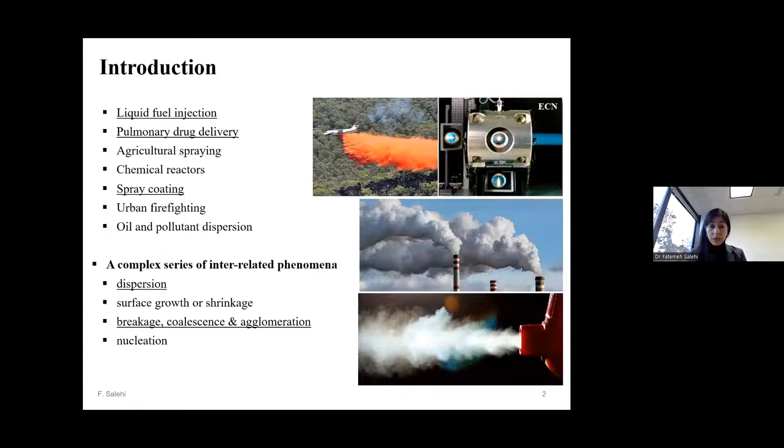As you're all aware, the majority of these applications are turbulent flows. So we can use direct numerical simulation, large eddy simulation, or RANS. In DNS, just a quick note, we resolve all the scales. In LES, we only resolve larger scales and model the smaller scales. In RANS, we basically model the average, and we're not resolving any scales.

Since we're dealing with two-phase flow, there are two broad categories we can classify simulations or modeling approaches into. The first is the Eulerian approach, where these methods define the cloud of droplets or particles by their velocity and concentration. These approaches are mainly suitable for primary atomization, for dense particle scenarios, for example in a biomass process.

We have another category called Eulerian-Lagrangian. What we basically do in this approach is use the Lagrangian method for the liquid or solid phase, assuming they are dispersed, and then track their dynamics, approximated as evolving points in space. This approach is more suitable for dilute spray regimes, secondary breakup, and low load particle flows.

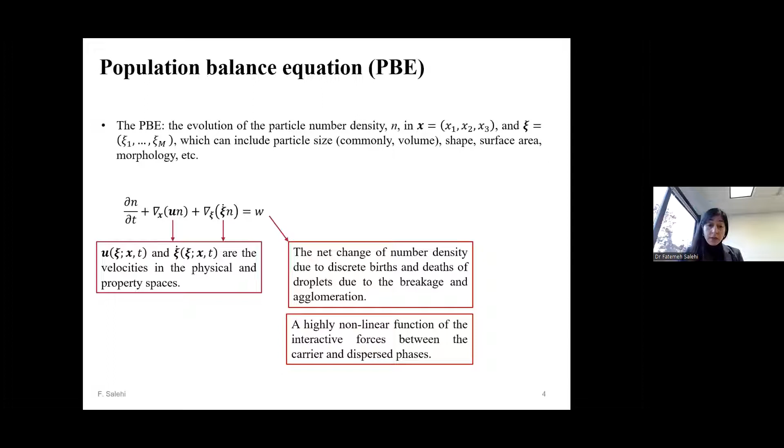So the projects that we actually work on were motivated by secondary breakup in combustion devices, but secondary breakup is relevant to other spray applications as well. The experimental study by Kourmatzis and Masri shows that the shapes of the droplets are quite important.

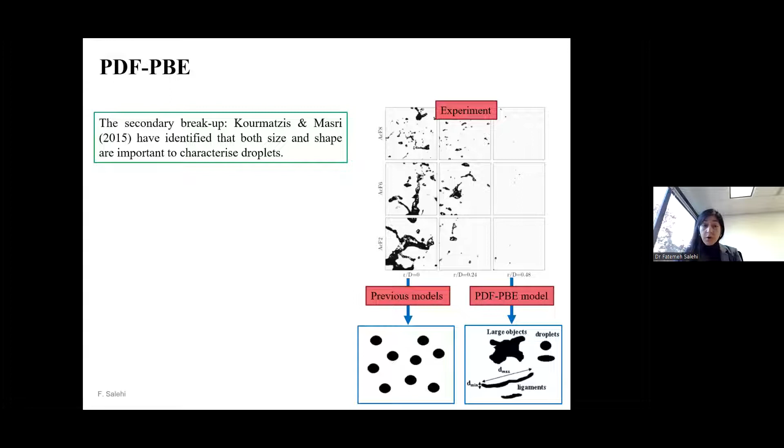It's not only their size, shapes are important to characterize droplets further downstream. What usual models do in secondary breakup, they assume they're all spherical. What we try to do with the PDF population balance equation model is to account somehow for the effect of the shape of droplets.

Since it's motivated by secondary droplet breakup, we consider our property space to include two parameters, or two properties. The first one is the size, and the second one is the shape. And we're focusing on non-evaporating spray, so basically the third term becomes zero or not important, and we end up solving a more simplified transport equation.

So this is the continuous equation. And when it comes to LES, particularly turbulent flow, the source term becomes highly nonlinear and challenging to model. PDF, or probability density function, is the approach that we can take to address this problem.

So we're using large eddy simulation for the carrier phase, which here is the gas phase, and we're using a PDF version of the population balance equation for the dispersed phase. The PDF version of the population balance is a continuous function, but its turbulent distribution is represented stochastically by an ensemble of Lagrangian notional particles in the Monte Carlo simulation.

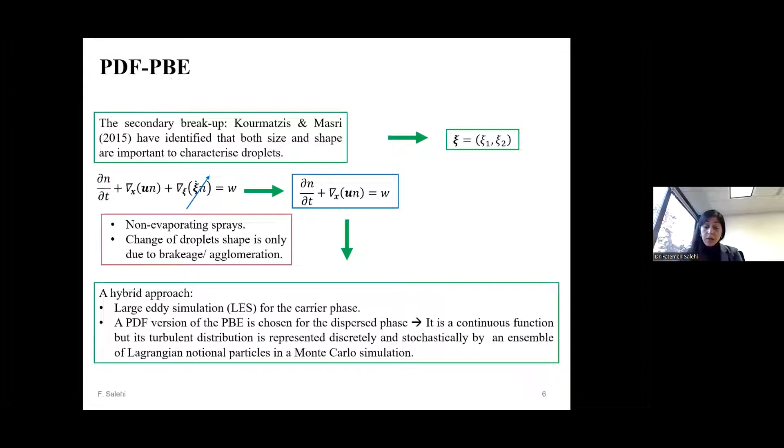Again, it's the standard basic concept of the PDF. The challenge is that if you're looking at this problem, in general the number density represents a range of droplet size and shape with very different slip velocities.

We cannot represent all droplet sizes and shapes with a single PDF. This is because of the different trajectory that the droplet will take due to inertia effects.

So to overcome this challenge, we came up with an approach. We're going to divide the PDF population balance into classes, and assume these classes represent the turbulent distribution of the number density of droplets that have similar inertial interaction with the carrier phase. I'm going to talk about how we come up with these classes later.

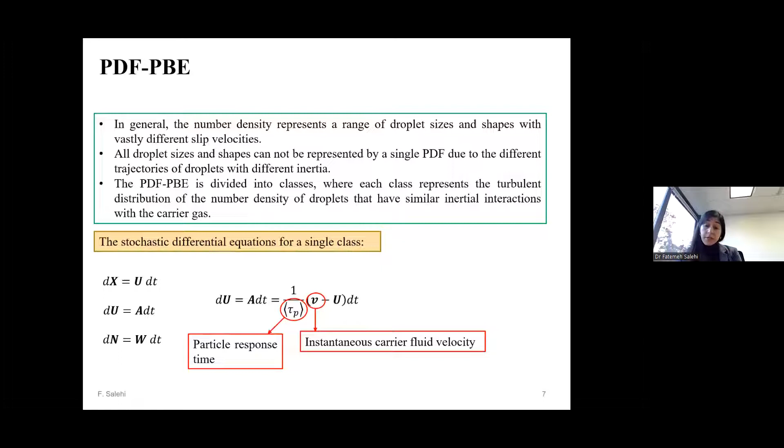But assume we have these classes, and then we can write down the stochastic differential equation for each class, which is similar to the standard stochastic equation for droplets. In this formulation, we have two parameters that we require to calculate or somehow address. The first one is the particle response time, and the second one is the instantaneous carrier fluid velocity, or the carrier velocity seen by the particle.

So this is because we're using the stochastic approach here. Tau p represents the mean across the class of droplet response time. This is due to the fluid-droplet interaction, and it's actually a function of the drag force. So if we assume each class is limited to droplets of only one size and one shape, basically this mean value or response time becomes equal to the response time of that particle size and shape.

The equation that we can write uses the function, the relation between tau p and drag force and slip velocity. The drag force is a function of the droplet size and shape.

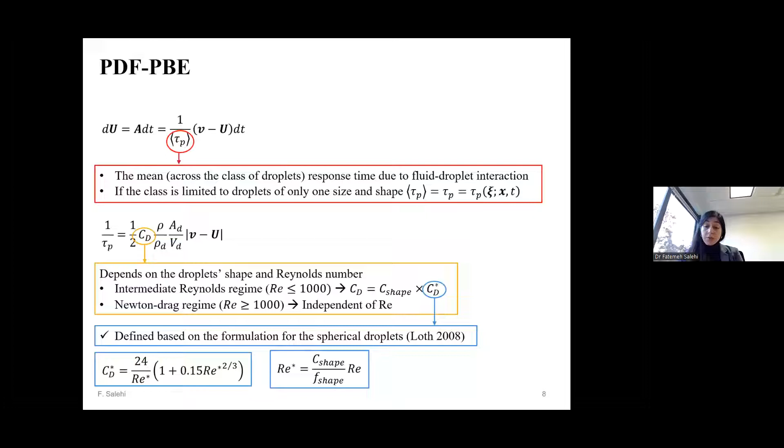Again, since we want to somehow account for the droplet shapes, we're using a modified drag coefficient, which is defined based on a Reynolds star that considers the shape factor. These shape factors come from the experimental study done previously by Loth and are available for different shapes.

The second one, as I mentioned, is how we're going to estimate the carrier fluid velocity. So this is the instantaneous velocity, or the velocity seen by the particle droplets. What we have from the LES is the filtered velocity, so somehow we need to approximate the fluctuating component.

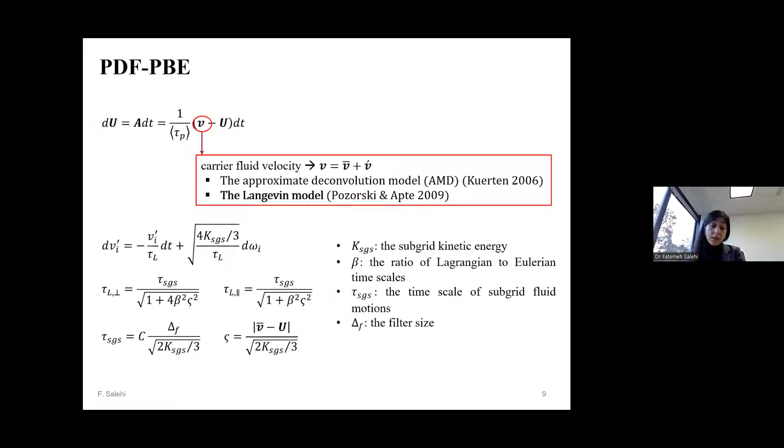So there are two broad categories. The first one is the approximate deconvolution model, AMD. And the second group is the Langevin model. There are different versions, so it could be very simple or very complex. Here we adopted a Pozorski version that assumes a stochastic equation to compute the fluctuating component.

So now it's about how we're going to identify the classes. We have an equation for each class, but the key is how we're going to identify these classes to ensure we're addressing the effect of the inertia.

We adopted a numerical method based on the Stokes concept. Stokes is a non-dimensional number that somehow represents the effect of inertia. It's the ratio between the particle response time and flow response time.

So a single notional particle represents a class of the number density function without significantly compromising the accuracy of the droplet inertia trajectories. We want to ensure we are not compromising the accuracy, that we're somehow addressing the effect of inertia. We can consider two extreme cases.

The first one is when there is no inertia forces. For example, droplet sizes are very small and they basically evolve with the carrier phase velocity. In that scenario, solving the PDF-PBE on an ensemble of notional particles means each particle in turbulence will represent a single realization of the entire number density function.

And we have a brute force option where we have a notional particle that represents only one size and one shape. Basically, our method becomes essentially a point model for a droplet.

We want to come up with something in between, and for this purpose we're using the concept of Stokes.

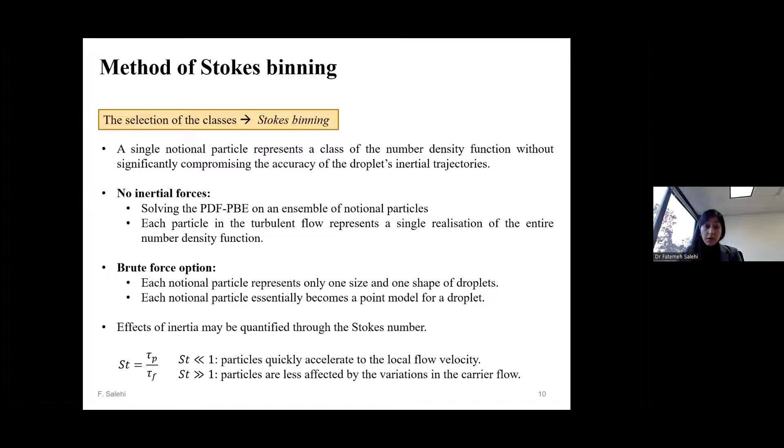So the way the model works is that we first establish the Stokes bins, shown with delta ST, assuming the inertial droplets have an approximately same dynamic response to the carrier phase. These Stokes bins are actually created prior to the simulation.

And then we have the notional particle representing a range of Stokes, shown with DST.

So the criteria is that if DST is smaller than delta ST, it means the notional particle represents droplet sizes that satisfy the Stokes criteria. In other words, representing sizes that can be approximated by the same value for the response time. Then we calculate the average and go to the next time.

So as you can see, at time 0, DST is larger than delta ST, so we're going to split it in a way that we now have two notional particles, P and Q, but each of them satisfying the criteria.

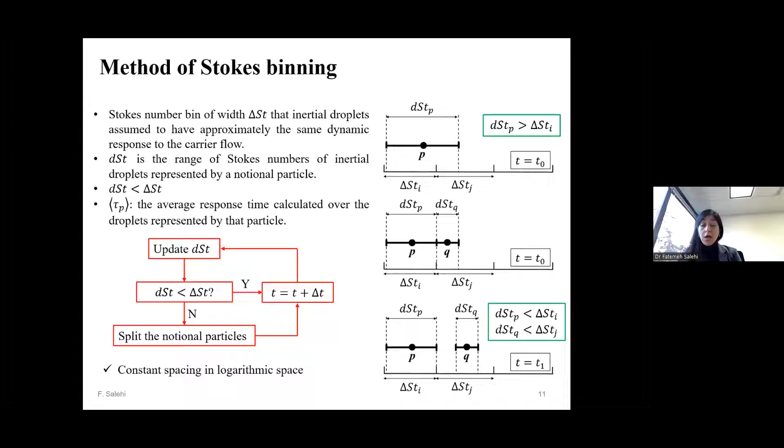The particles will evolve based on the governing equation, and at the next time step we check the criteria again, and if any particle doesn't satisfy it, we repeat this process.

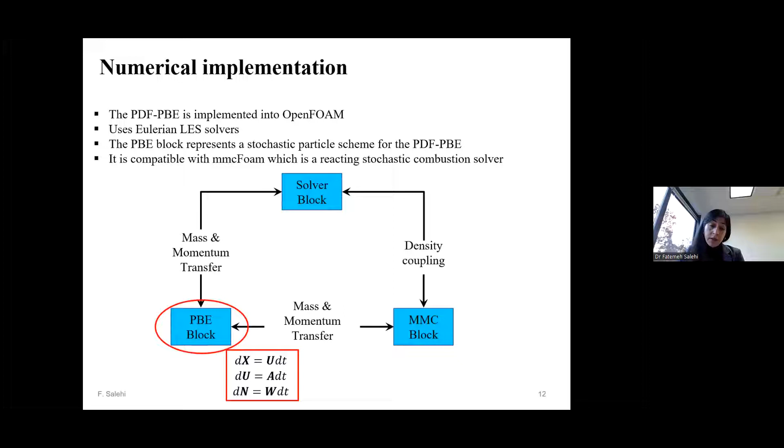The model is implemented in OpenFOAM using the Eulerian LES solver that exists in OpenFOAM, and it's also compatible with mmcFoam, the combustion solver developed by University of Sydney.

The first step was to do some numerical analysis to ensure the model works. For this purpose, we tested two different configurations: injecting the particle in line with the jet flow, and injecting the particle cross flow.

So the aim of this configuration is to assess the model, the framework. We consider poly-size but mono-shapes, and also poly-size and poly-shapes, and we assess the model performance against the point particle.

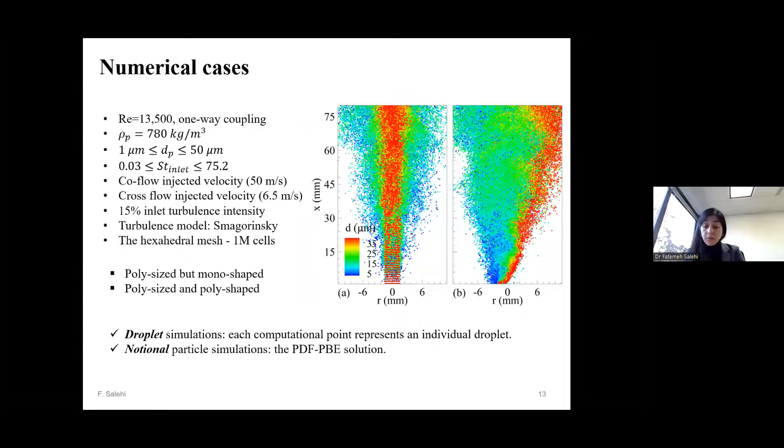We call it droplet simulation here, where we basically follow each individual droplet. So the first step was to assess the convergence.

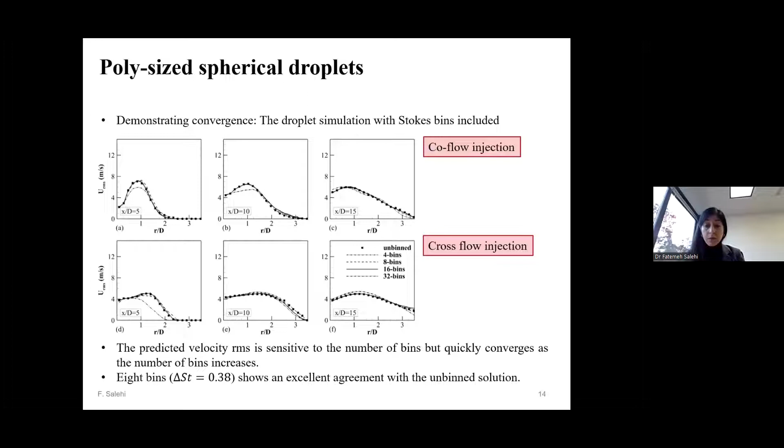We can see that as we increase the number of Stokes bins, the model is initially sensitive to the number of bins, but eventually becomes independent, and we don't see any variation, which is true for both co-flow and cross-flow injection.

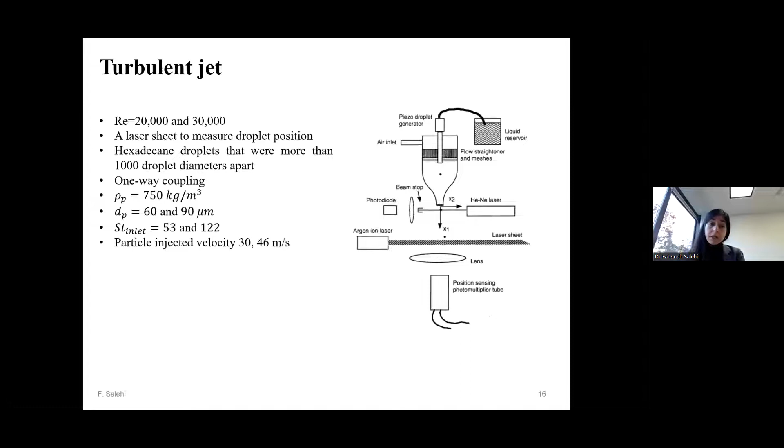And we try to do also some validation against the experimental data. For the first step of the validation, we use a turbulent jet with one-way coupling—we don't want to add complexity. Two particle sizes, 60 and 90 micron, equivalent to inlet Stokes numbers of 53 and 122.

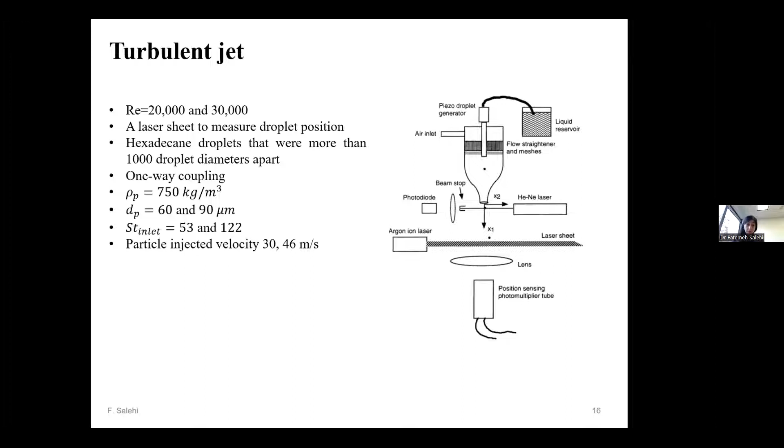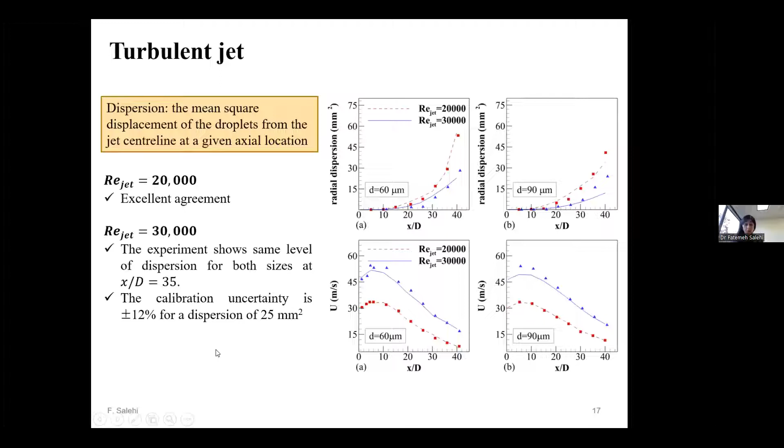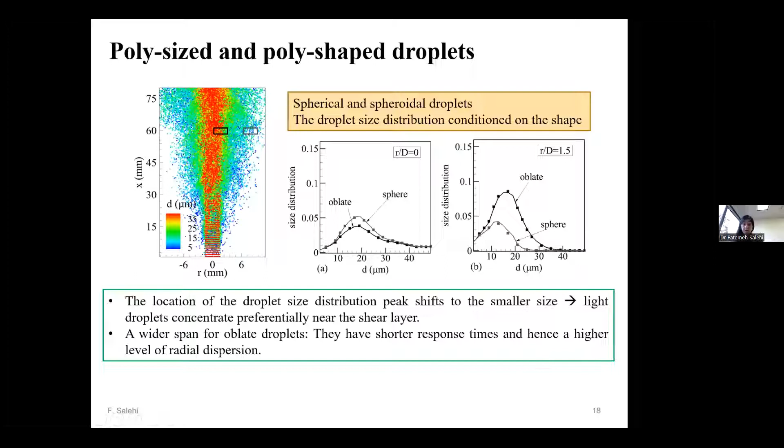We also did a simple test to see how the model works for breakup, because the motivation was to come up with an approach that can account for droplet size and shape, but also a method that gives better control on computational cost. In the point particle method, when we have a droplet breakup, we don't have any control on computational cost, because the number of notional particles just increases as breakup occurs.

This is a challenge for the Lagrangian method, but with this method we have much better control. We adopted a very simple breakup model, again to emphasize that breakup is the physical process, and notional particle splitting is a numerical modeling tool. In other words, if you have a droplet breakup, it doesn't necessarily mean we're going to split the notional particle. Droplet breakup happens because of physical meaning.

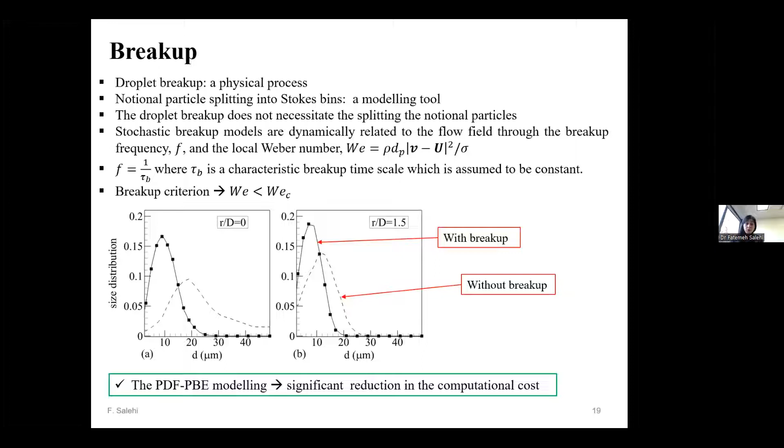Here, for example, we consider it based on the Weber number and a frequency, a characteristic breakup time. But if it doesn't satisfy the Stokes criteria, then we split the notional particle. The results show with breakup and without breakup, and as we have breakup, there's a significant difference. The results also agree well with the point particle simulation in capturing the breakup, even with this very simple model. But most importantly, we found a significant reduction in computational cost: using PDF-PBE, the cost was about one-third of that using the point particle method.

Then we apply the model for more complex scenarios. This is the polydispersed flow in a bluff body, in a two-way coupling regime. The experiment was conducted by the Borée group, and the particle size ranges from 20 microns to 100 microns. Mass loading ratio is 22%. It's the two-way coupling regime, which means the particles and droplets affect the carrier phase.

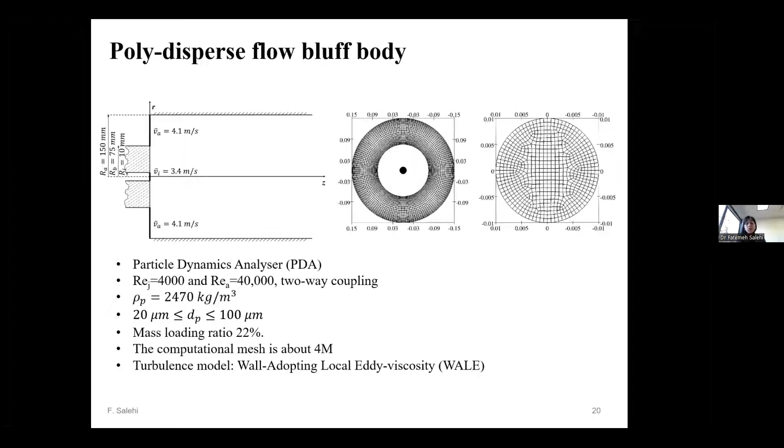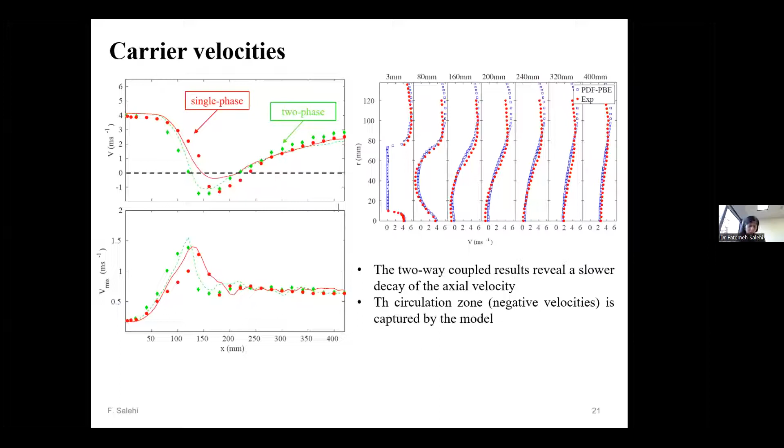There are some discrepancies when we actually have a single phase. The model shows a slight difference, but this could be due to the initial boundary condition. Nevertheless, it's quite good.

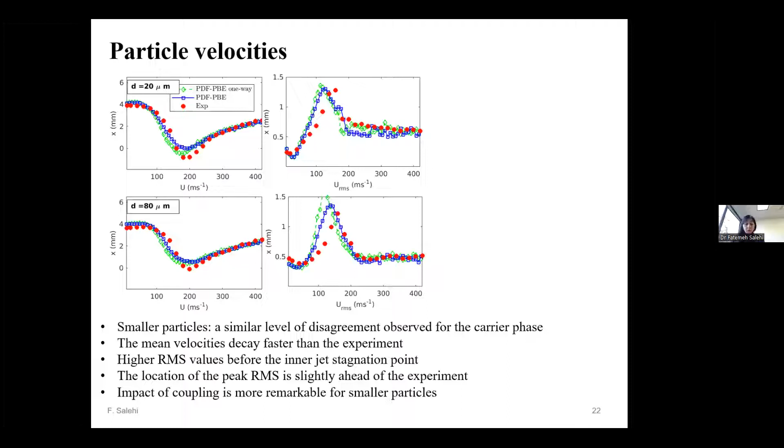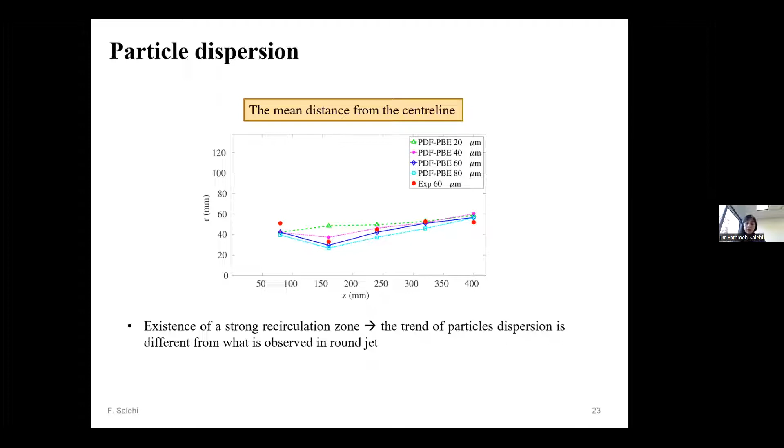It's interesting to see 20 micron shows a completely different trend. It just shows an increasing trend, although for a larger particle, we can see the decrease and increasing trend, which is also consistent with 60 micron.

We later applied the model for a polydispersed jet. This is actually an experimental-simulation study we did with University of Adelaide.

With the measurement, what they can do is use PDA and PIV measurements, which allow them to capture the mean concentration. It's a very great technique for obtaining detailed analysis when we have a monodispersed jet, but for polydispersed, it can only provide us the mean value, not really details.

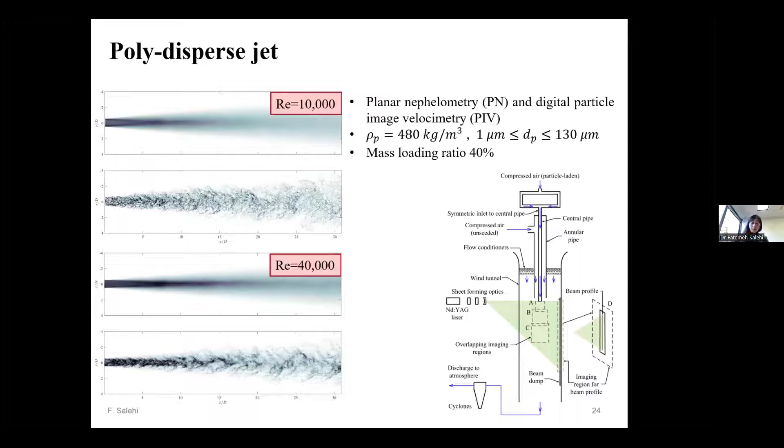With the simulation, we try to see how to provide further information regarding the physics happening. We focus only on Reynolds 10,000 here, although we have results for 40K as well. So the first step was just comparing measurement and simulation.

If you're looking at the velocity, again with the measurement we can only measure the mean value. We can see there is an excellent agreement with the PDF and experiment. There's a slight difference near the jet, which could be relevant to the boundary condition.

Then if you're looking at the concentration, we can see the trend captured really well, although there is a difference further downstream. The symbol shows experiment and the line shows the simulation.

In this study, we consider a much wider range of particles, from 1 micron to 130 micron. It's much wider, much better to assess the ability of the model for capturing the physics in polydispersed jet.

It's interesting to see a hump. If you're looking at the concentration, it's a very small hump, but it's captured with both simulation and experiment. The reason for this hump is the combination of the particle axial deceleration and radial migration of particle

from jet edge to the center line, so that we have a concentration peak at about 5.7 diameters away from the jet.

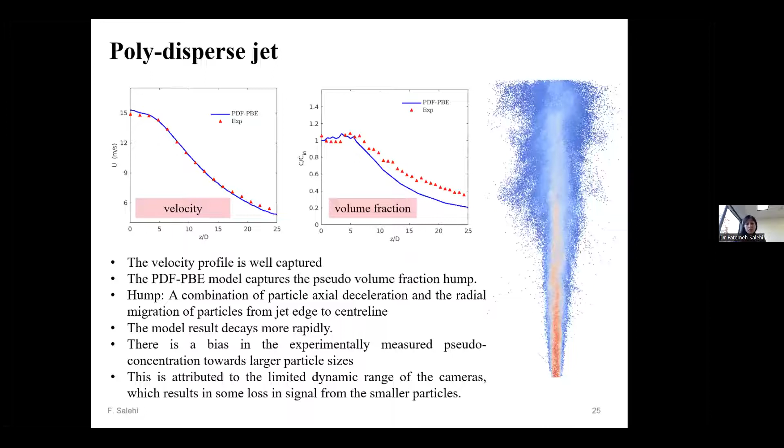The reason for this discrepancy, we think, is not just due to the numerical simulation. It could also be contributed by measurement bias in experimental measurements. We measure the concentration toward larger particle sizes, and this is due to the limited dynamic range of the camera, which may result in some loss of signal from smaller particles, and that's the reason the concentration is lower from the measurement. But the aim is to provide further information in such flow.

So now we focus only on the simulation. If we look at the simulation results, the first figure on the left shows the velocity for each particle size or inlet Stokes number. We can see that particles with greater Stokes number have a lower axial decay rate, which is expected because they are less responsive to the flow.

Looking at the small figure embedded in the first one, we can see that in the far field the trend becomes linear. This confirms self-similarity in the velocity profile, which is something observed in monodispersed cases.

If we look at the concentration, we see a huge difference between different particle sizes or different inlet Stokes numbers. At the first 2-3 diameters downstream from the jet exit, we see constant particle volume concentration, but further downstream the results are quite interesting.

When the inlet Stokes number is between 0.3 and 9, we see a local maximum. This hump is the result of, as I explained in the previous figure, deceleration and also radial migration of the particle from the jet edge.

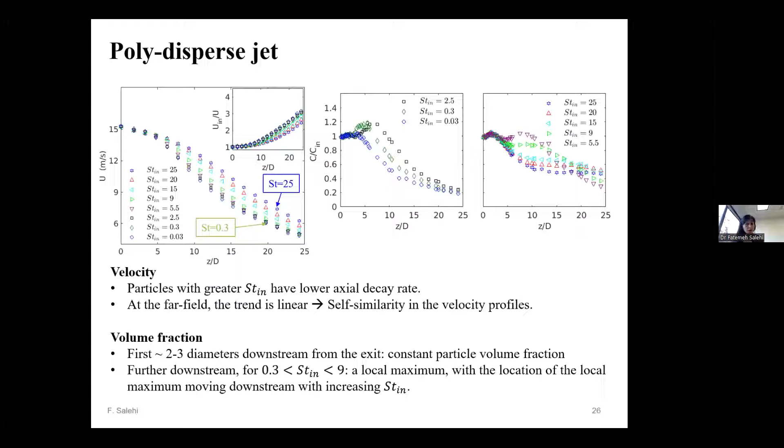And then if we look further downstream for the larger particle size, we can see that this hump eventually disappears. Again, this is relevant to the fact that larger particles are less responsive.

We also want to see the differences between the monodisperse and polydisperse cases. Again, we have the same size distribution, but we want to compare them with the monodisperse. This is another key benefit of the simulation: we can easily do that by turning off the source term in the momentum equation. But to do it with experiment, it's required to repeat the experiment for each particle size. The impact of the two-way coupling or momentum feedback is quite significant.

If we look at the lines representing results from monodisperse and the symbols representing results from polydisperse, it's interesting to see that for the larger particle, the black line represents the gas or single phase. The larger particle velocity is higher than the gas phase velocity, in the far field particularly, due to the effect of inertia.

When the Stokes number is small, less than 0.3, we can see the effect of the larger particle on the gas. Looking at the green symbols and green line, they basically fall or become very similar to the gas. This is because in the two-way coupling we have larger particles, and those larger particles have an impact on the carrier phase, which eventually affects the dispersion of those particles. Everything else is the same here; the only difference is that we have a two-way coupling.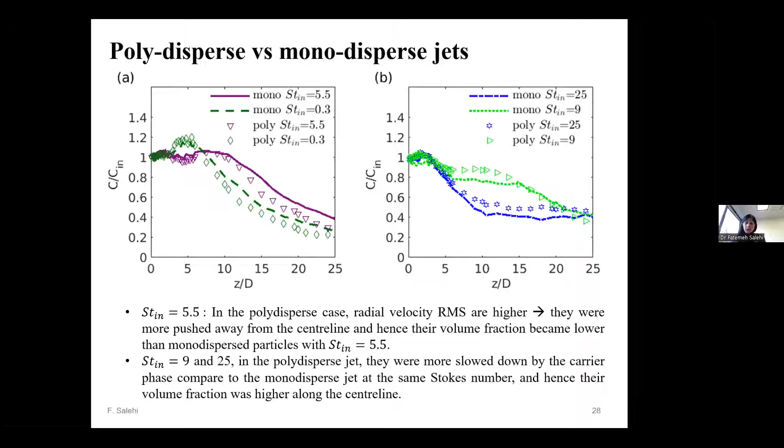Although in velocity we haven't seen a huge difference between the monodisperse and polydisperse for larger Stokes number, in concentration we see there is a significant difference.

I also like to quickly present some results relevant to biomass pyrolysis. These results are not based on the approach that I explained earlier. It's actually an Eulerian method, and the simulation was also done by Fluent, but I thought it's relevant to this talk, so I thought it's good to present.

So a very quick introduction on biomass fast pyrolysis. The reason we are interested is because biomass is an eco-friendly energy source. They significantly produce lower SO2, CO2 and particle matter, and they are a great source for products coming from biomass, such as bio-oil.

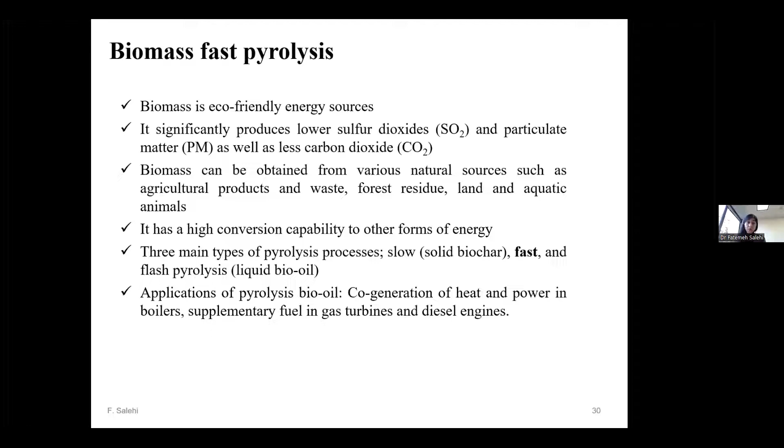They are a great source for heat and power in boilers, supplementary fuel in gas turbines and diesel engines. Particularly, biomass is very popular in some countries such as Sweden, because they have access to biomass sources, and also it's a very cold country. So there is a lot of research happening in biomass and gasification, and we worked with them on a couple of projects.

So there are different techniques when we're talking biomass fast pyrolysis. First of all, it depends on what we are interested in. There is fast pyrolysis, slow pyrolysis. Here the focus is on fast pyrolysis. The reactor could be bubbling fluidized bed, auger reactor, or conical spouted bed. They are popular reactors considered by different research groups.

We study and simulate all these three reactors, but the focus, or the result I'm going to present today, is relevant to the fluidized bed.

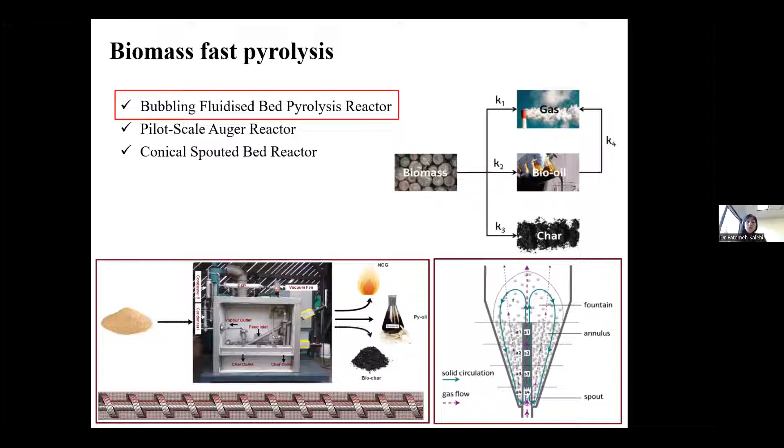So the case that we consider, to do model validation, the configuration is shown here. We have the reactor initially packed with sand particles, packed to a certain height, which acts as a carrier, and then we have biomass injected from the left side. Nitrogen is injected from the bottom, which is the carrier gas, so it's an oxygen-free combustion environment.

And we have a certain size for the sand diameter, initial packing, etc., which are provided here. The method or framework for this was to first do a CFD analysis, to do the model validation, and understand the impact of operating parameters.

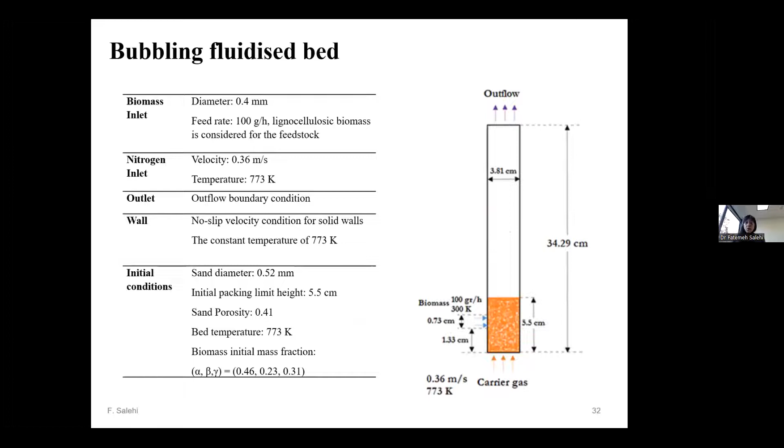If I just go back to this slide quickly, this is a highly nonlinear problem. So we have a reactor, and the goal is to enhance or increase the bio-oil production. But it's a nonlinear function of operating parameters, for example the nitrogen velocity, the wall temperature, the biomass particle size, the sand particle size. All of them have an impact on the bio-oil production.

So in this study, we were interested to first understand how these parameters affect the bio-oil production, but also coming up with a faster approach for the prediction and for the optimization.

So the first step is to establish the CFD model. As I mentioned, we're using ANSYS for the simulation, but then we want to feed this CFD dataset to the machine learning algorithm, which I will explain in the following.

So for the CFD analysis, we just use a multi-fluid model based on the kinetic theory of granular flow. It's a high-loaded flow, so obviously Lagrangian method is not suitable, so we're using the Eulerian method. It's a three-phase model because we have sand particle, biomass, and gas phase.

The way they actually interact: there is mass, momentum, and heat transfer between the biomass and gas phase. Sand particles are not reacting, they're just acting as a heat carrier, because the heat capacity of the biomass is very low - that's the reason sand particles are required as a heat carrier. And there is momentum and heat transfer between sand particles and both gas and biomass.

So it's a laminar flow. The Reynolds number is very low, and we're using a superimposed reaction kinetic based on a multi-component, multi-step reaction kinetic for combustion chemistry. We did the validation against the measurement data, and we can see the agreement is quite satisfactory. For example, if you're looking at the condensable oil, the percentage of the difference is 13%.

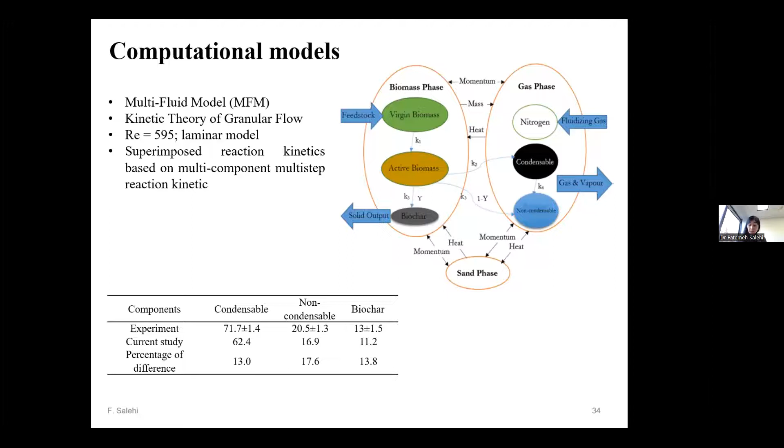Now we take this model to do a parametric study. We're looking at the impact of different parameters that we think affect the result, such as temperature, particle diameter, nitrogen velocity, injection height, sand particle size. So the first aim was to understand the impact of these parameters, and also to establish a data set that we can use for data analysis.

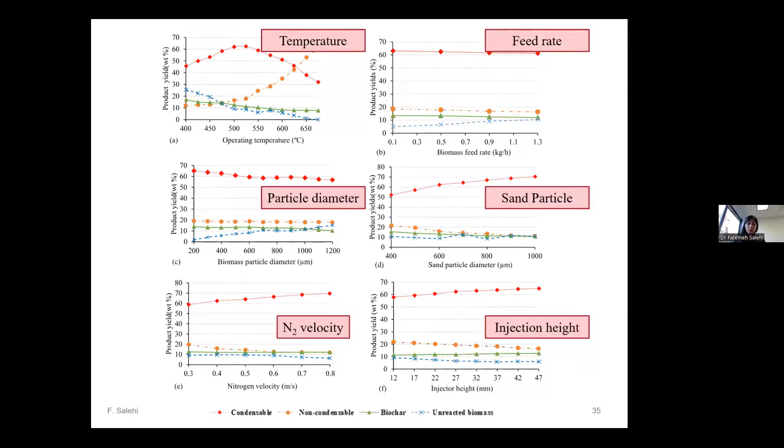I'm not going into details of all of these results, but just to provide some insight: if we're looking at the temperature, we can see in the first graph, shown by red symbols and line, representing the condensable oil. As I said, we are interested in condensable oil.

We want to maximize it. So as we see there is an increasing, decreasing trend. This is because of the impact of the temperature, which accelerates the devolatilization of the biomass as well as the primary reaction rate. At temperature above 525 degrees Celsius, we see the bio-oil production start decreasing.

This is because the secondary crack starts happening, which converts condensable vapor to non-condensable gas, and this is not desired. If you're looking at the particle diameter trend, we see the condensable oil slightly decreases as the biomass particle size increases, but the impact is not very significant.

We can overcome this if we provide sufficient heat for the biomass particle, since using coarser biomass particles is usually more acceptable. Some of these parameters are not very attractive to industry to change. For example, the biomass particles are already grained, and putting more energy or effort into making them finer is not necessarily something they desire.

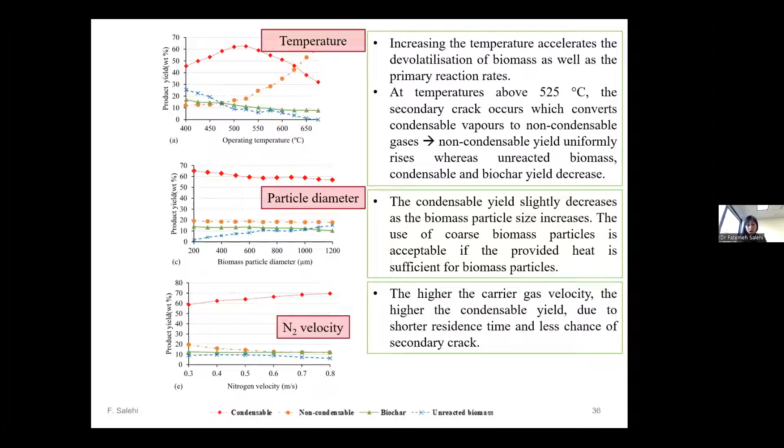But we did a further study, not presented here, showing there is also an optimum point. After a certain point, we will see the product yield start decreasing as we increase the nitrogen velocity. We also have limitations depending on the height of the reactor, otherwise the biomass particle just gets to the end of the reactor without devolatilization or producing any bio-oil.

So we have this data set. The way we did the parametric study was basically looking at the impact of each parameter while considering other parameters constant. But for the machine learning algorithm, to ensure our data set is not biased and we have sufficient data, we did further simulations with the input parameters randomly selected.

In the second part of this work, we use machine learning for two purposes. First, to come up with faster tools that can predict the bio-oil based on the input parameters without doing CFD calculation. Second, to do optimization.

For the prediction, we use support vector regression. There are different regression models that we can use, as I said, for multiple objects, nonlinear functions of multiple inputs. For the optimization, we use PSO.

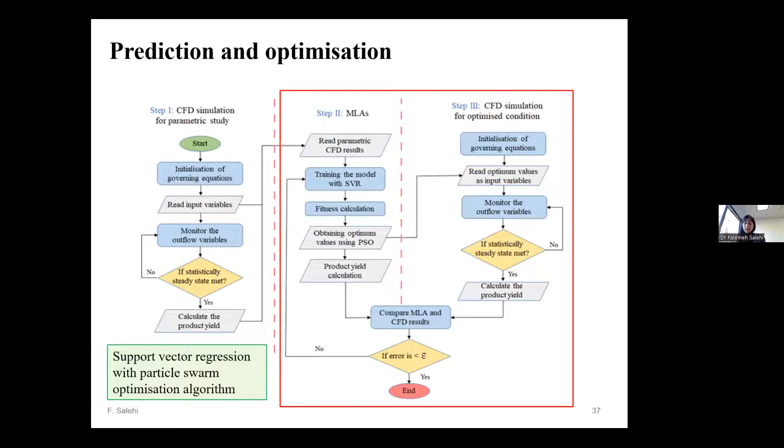Then we feed the outcome of the machine learning back into the CFD simulation to see how the CFD prediction agrees with the optimization result.

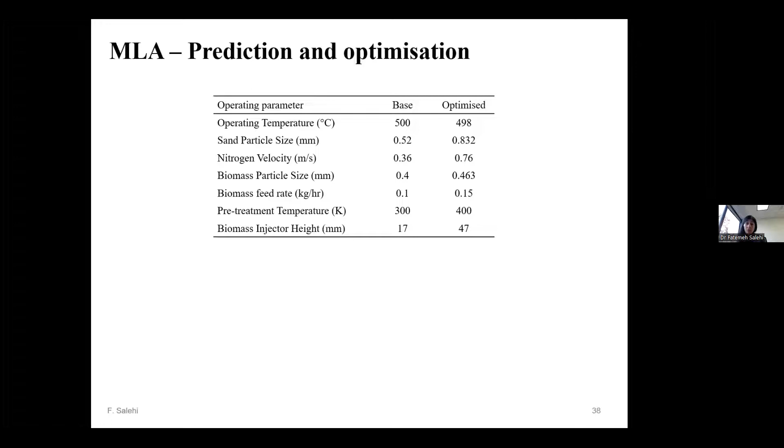If you look at the table, the base scenario, which was the test done by experiment, is provided here, and the optimized values are given here. It was interesting to see how some of the parameters selected for the base case are suitable, but how others are required to be changed.

Then we took this optimized value and put it into our CFD model to validate the optimization tool, and it was interesting to see the results. If you look at the machine learning algorithm output, the value predicted for condensable oil is about 70.7%, and CFD provides 73.4%, which is quite close.

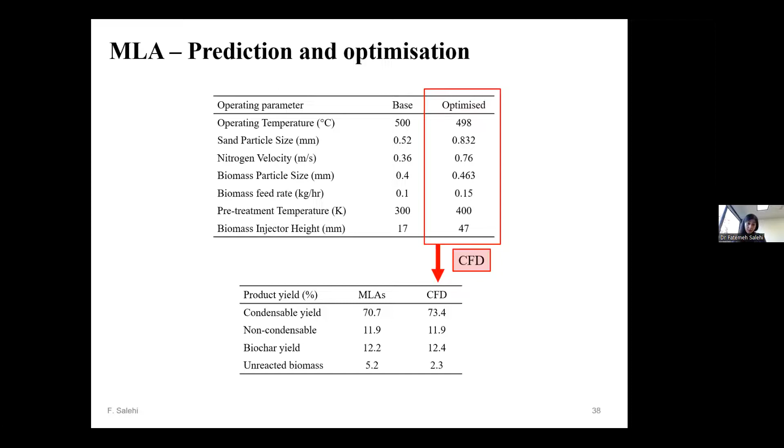Non-condensable gas was also very close. The only difference was for the unreacted biomass, where there is a difference between CFD and the machine learning algorithm. But generally it's quite good, confirming again the accuracy of the optimization tools.